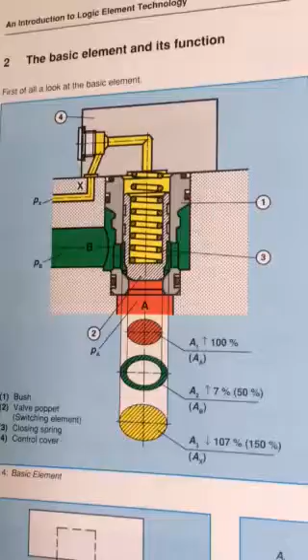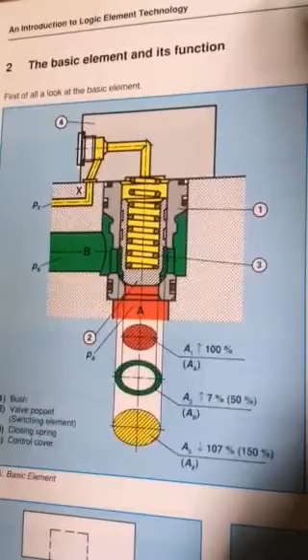Today we find logic elements applied in the drive and control of presses, injection molding and die casting machine tools, especially in broaching machines. Further applications are in the steel industry and mobile hydraulics. Application in these areas has resulted from the specific requirements of these installations and the characteristics of logic elements. They are only applied where economic and technical advantages over conventional hydraulic products are found.

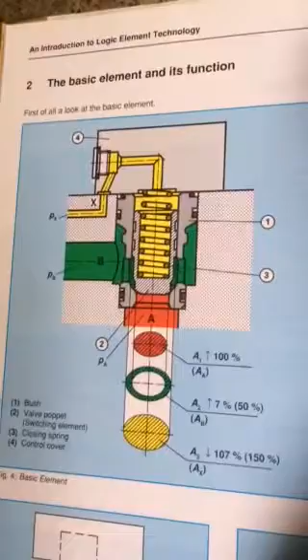Each case must therefore be studied individually. The main advantages of logic elements can be listed as follows: large flow range, compact installation dimensions, directional, pressure and flow control valve functions,

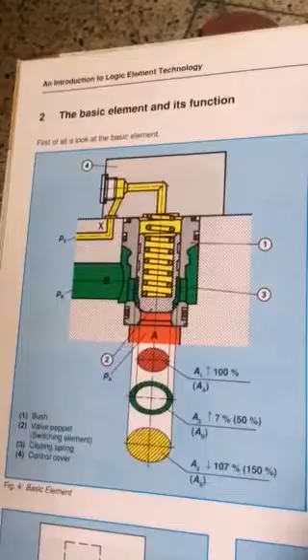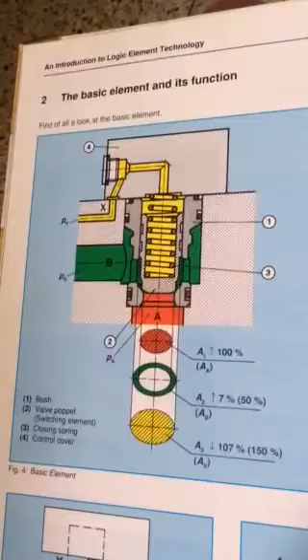or multiple functions within a single unit, pressure tight sealing dependent upon the control, extremely short operational times possible, gentle operation possible, minimum pressure peaks possible, unlimited holding time possible, minimum wear, long service life, high functional reliability, low sensitivity to dirt, practically no power limits, high permissible operating pressure, and standardized installation and dimensions.

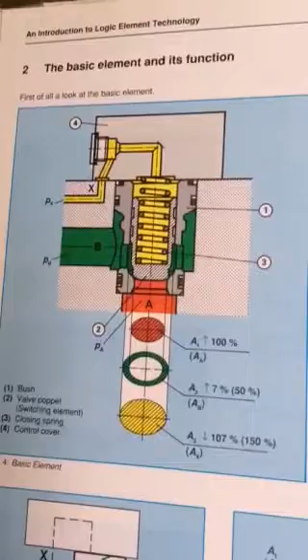Due to the complexity of modern pilot control, and without closer knowledge of the characteristics of these elements, understanding and judging these advantages is very difficult.

This gives rise to the saying which was once made in connection with logic elements: logic elements are both famous and infamous. One can do practically anything with them, but they do practically anything they wish if one does not understand their characteristics.